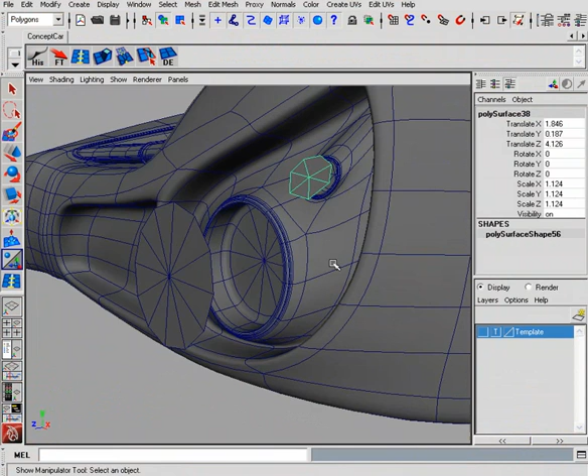In this lesson, we'll continue to work on the headlights. We've got this geometry that we copied, or duplicated, before we finished work on this headlight area itself. So we can use this for the actual headlight and also for the headlight cover.

For the headlight, let's go ahead and extrude that back, give it a little bit of thickness. Okay, it doesn't have to be too thick. And we'll go ahead and reverse those normals.

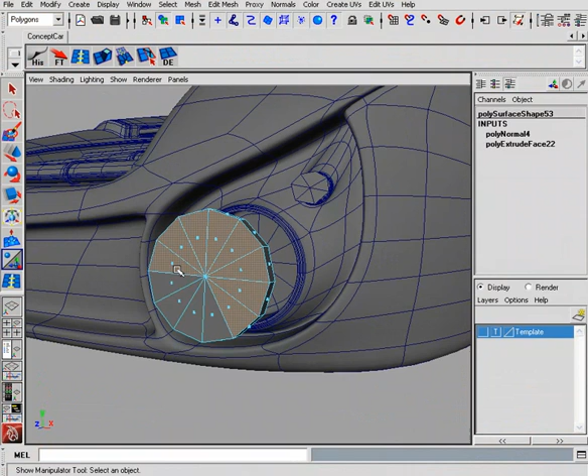Alright, let's go ahead and pick the front of the headlight. Let's give it a little bit of an interesting shape here. So let's go ahead and extrude that, scale that in.

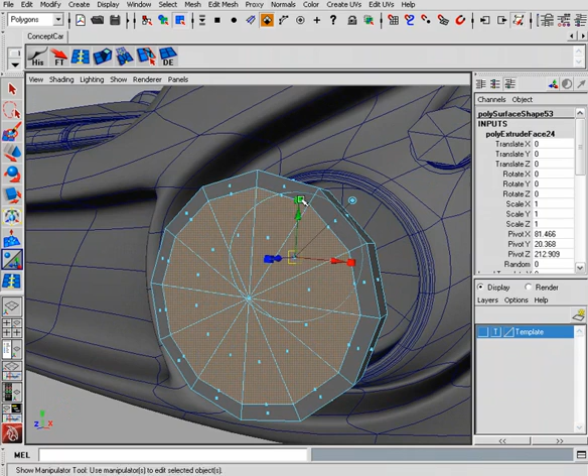Okay, and let's say that this area out here we're going to use as sort of a ring of LEDs. So we'll keep that. I'll go ahead and extrude that again, extrude it down into here.

And let's scale it up a bit. But let's pull it out just slightly. And then extrude that in.

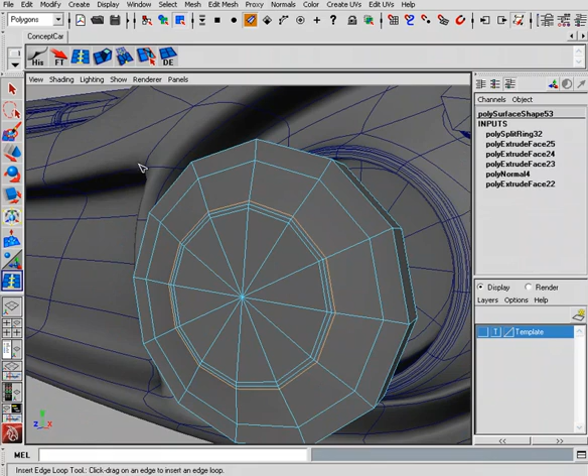Right in there. Okay, and then we'll add another edge loop right out here so that we get kind of a nice faceted look there. If we turn off our... something kind of like that. And then we can come in and insert an edge loop in here.

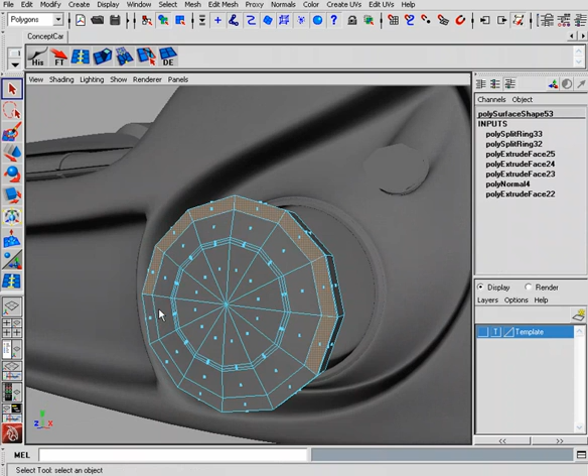Alright, let's go ahead and copy these faces for our little ring of LEDs. Go ahead and take all of those faces and just duplicate those out. Duplicate face. Go ahead and pull those off of there.

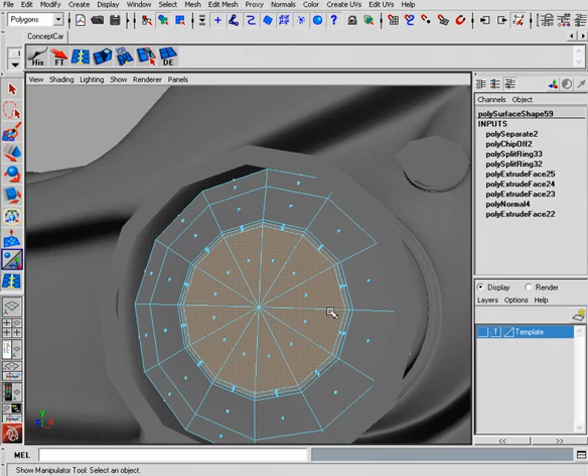Alright, and let's also choose the entire front. So we'll go ahead and select the interior here. Let's go ahead and hit Shift, period, until we get all the way just to the front there. And let's also duplicate that. Okay, and we'll pull that off as well for our cover.

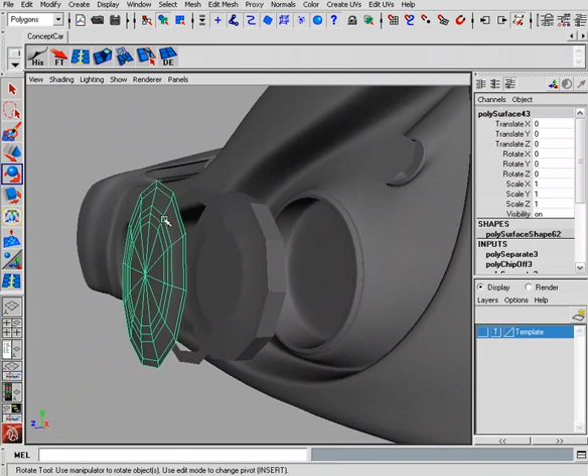Alright. Let's go ahead and grab this and let's shape it a little bit. Let's actually just scale it. And see if we scale it, that it's not going to be quite right, so we'll need to pull that off.

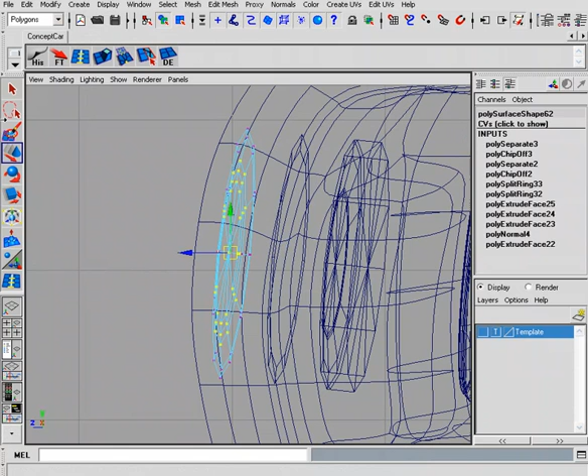Actually, so go ahead and select those, basically that whole interior section. Okay. And you can check the different axes, see what they'll get you. I'm going to go ahead and pull this off. I've got some points that I don't quite maybe have selected. There we go.

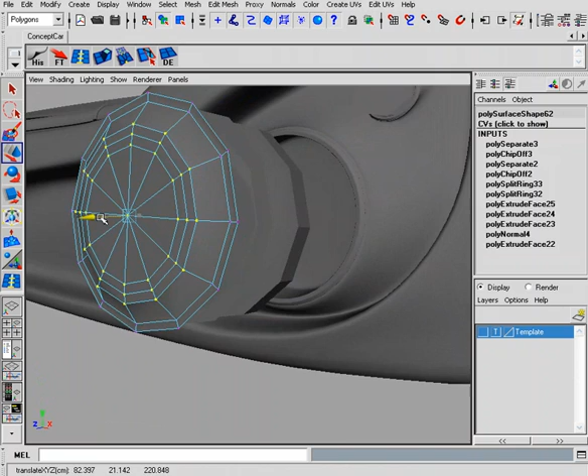And just something so that we can get the cover for our headlight. And I'll select this bridge all the way around here as well. All the way around. Okay, and that can be our headlight cover.

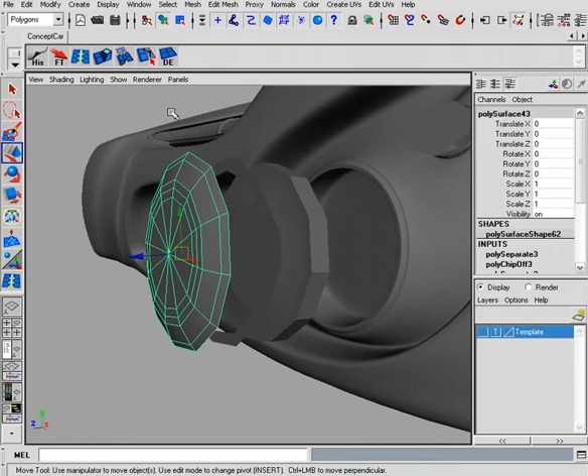Looks like we missed a point there. We're pulling that out. There we go. Pull that entire thing out, and also this.

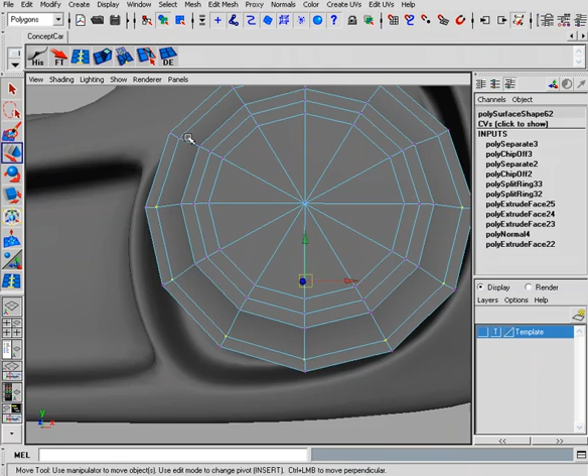And then we'll turn that ring into kind of a ring of LEDs. And select all of those points and pull them out. Just kind of like that.

Go ahead and extrude, or delete the history rather. Alright, I'm going to just pull this out a little bit more so that we can see what we're doing here. Go ahead and center that pivot.

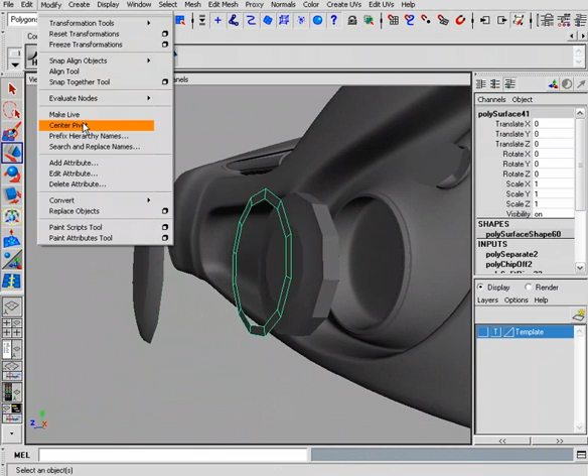Let's go ahead and smooth this. So I'm going to go ahead and do a smooth, and let's go ahead and take off preserve geometry borders, and we'll just do a smooth. And let's change our divisions to 2.

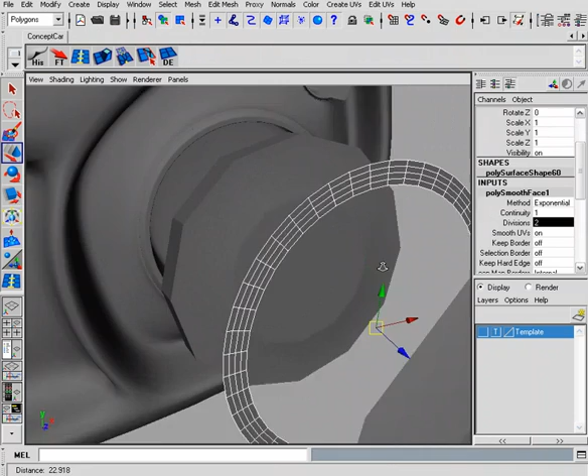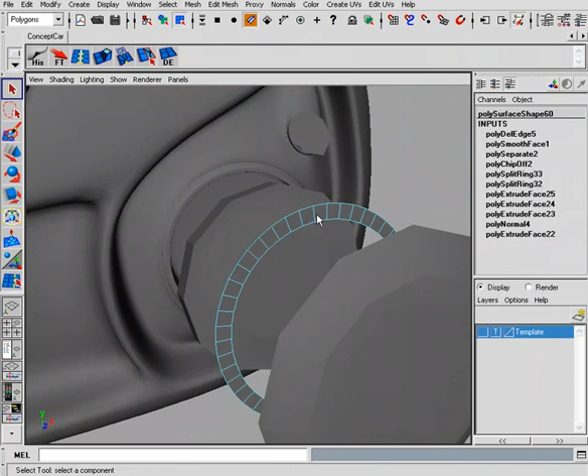Alright, okay, so what I'm going to do now is select some of these faces to be our little LEDs. Okay, I'm going to go ahead and select all of these loops and just delete those. Okay, I'll select all these faces.

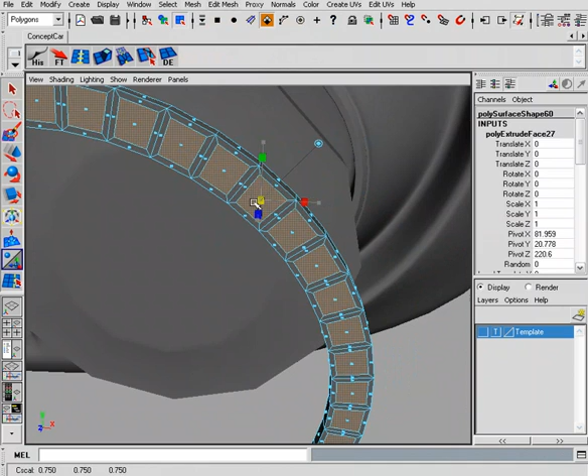And pull those back, give it some thickness. Then I'll turn off keep faces together. I'll do another extrude, and this time I'll scale that in. Okay, and we'll do another scale, and another one, and this one I'll pull straight out, and then again.

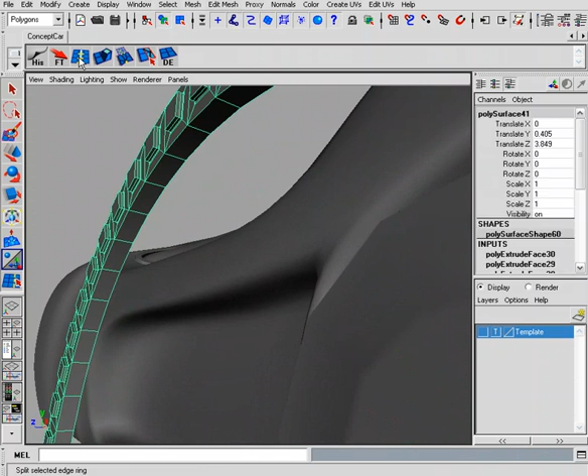So now I get something with these little lights on it, and I can add some resolution in here to hold that edge, and I can also delete the back edge if I want to. Alright, something kind of like that.

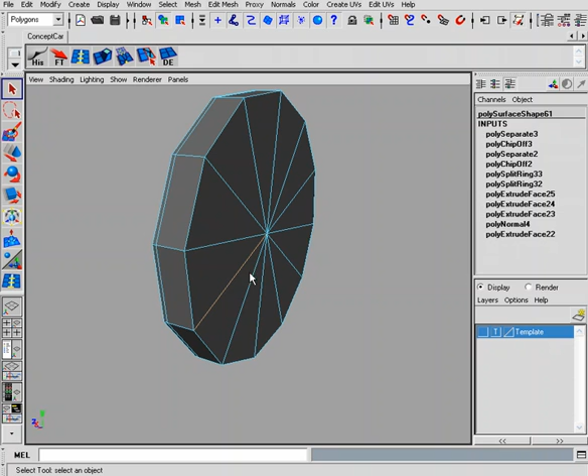Now this guy, let's say that we want to create a sort of a section and cut this apart. So let's go ahead and just select this. Let's say we want to cut a section out maybe right down here. So I'm going to go ahead and delete basically those edges. I'm going to also delete the back here, just selecting all of these faces.

Alright, so now let's decide basically where we want to cut this. We'll say that we want to kind of cut that across right there. So let's go to the front view.

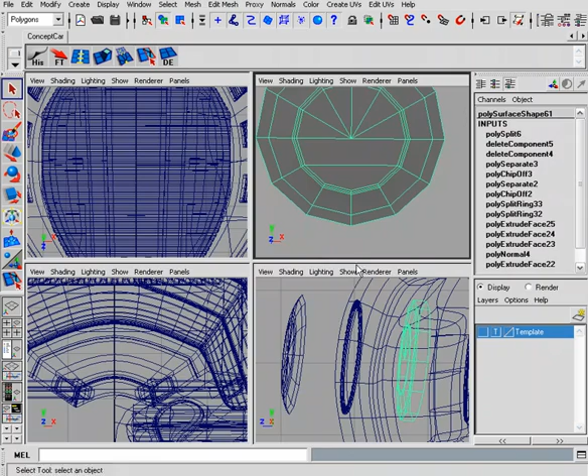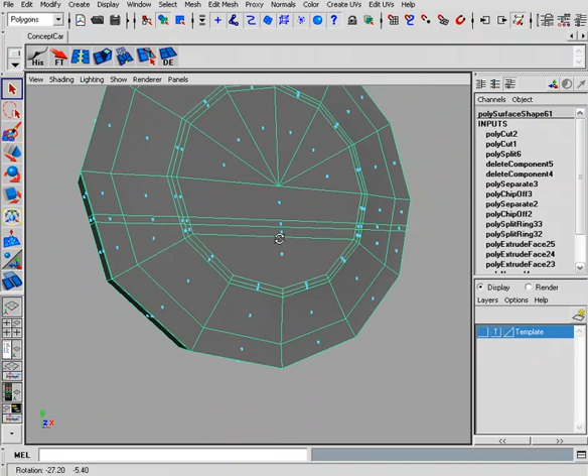And let's do a cut faces right across here, and then right across there. That'll give us a little bit of geometry to be able to cut out. Let's go ahead and select that and delete it, and delete that as well. Same sort of thing there.

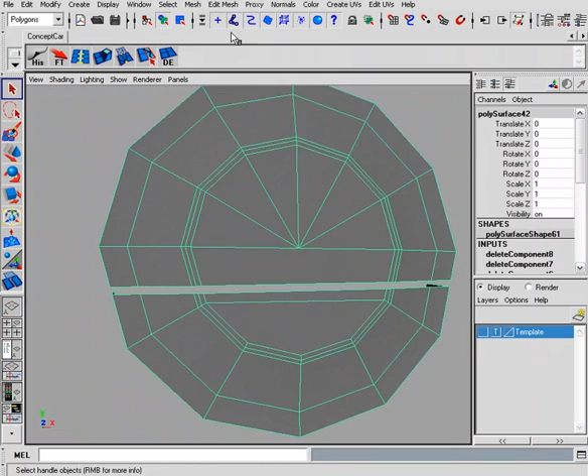Alright, now we just need to close this sort of area off. If you want to work with these separately, you can go up to mesh and separate them. That might be a little bit easier.

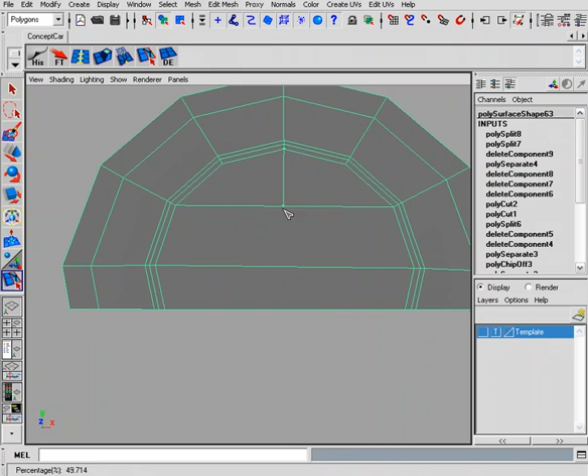Okay, and I'll just show you this piece here. We can modify our topology here. Maybe bring this straight across, bring this straight across, and just kind of avoid the poles that we had going on there. Bring that straight down. Gives us a little bit cleaner geometry right there.

Alright, then we can go ahead and take this edge, just that edge, and this edge, and go ahead and do a bridge. Then we can start to add resolution in here where we need it.

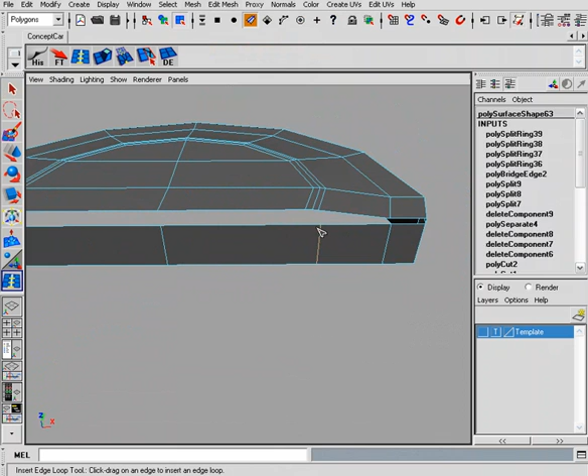So we just want to kind of flatten this off. There's 3 right in there, and 3 right in there. Go ahead and select a border edge, and we'll do a fill, and now just connect those up.

And you should have the right number to just kind of come right across and connect those up with your split polygon tool. Hit enter.

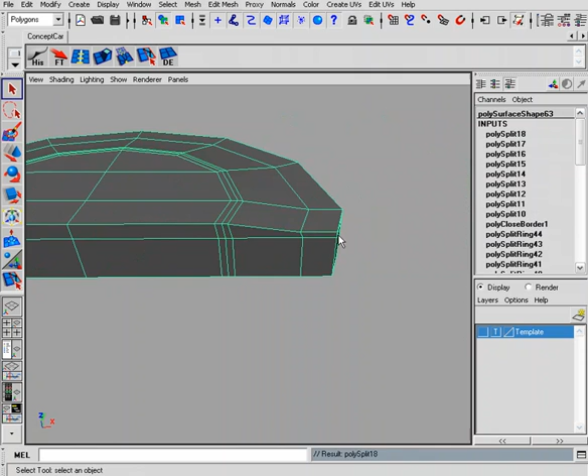Okay, and then you can come in here and add another edge loop right in here and kind of create that tightness right in there. So if we look at our other piece, we just want to do the same thing there.

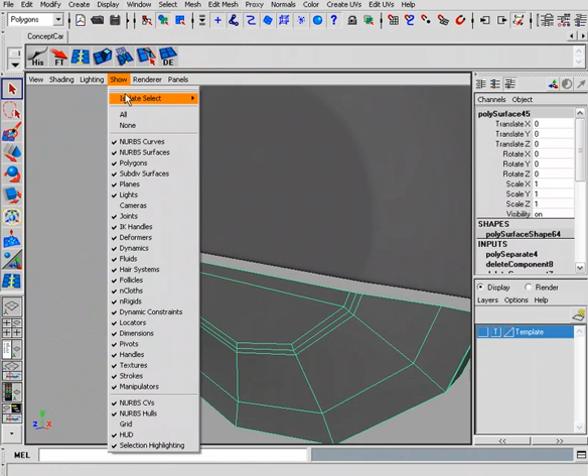Alright, and then once we have all these, we can just move them straight back into our headlight area. And you can layer that over the top. You can scale it down if you need to, and then put this over the top. And then you can just do the same thing, the exact same process we did down here with this guy.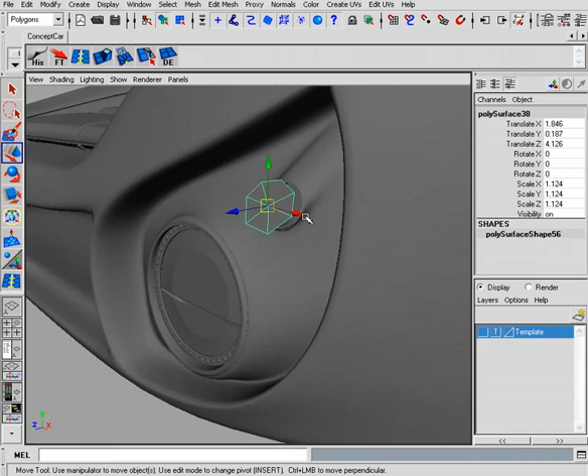I wouldn't necessarily make the LEDs. I would just make maybe just the headlight, and you don't even have to cut it apart. Just make a shape that can go in there. So I'd use it for the headlight and also for the headlight cover. So if you want to have a little cover across there, you could do the same thing as well.

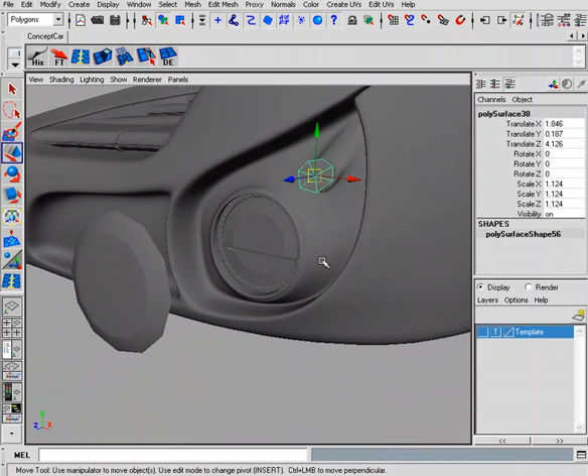Alright, so I'm going to go ahead and just put those into place, and then we're going to create some shapes that can go inside here, and also the main headlight cover itself to go on the outside of this entire headlight. So I'm going to finish that up, and then we'll come in the next lesson and continue to work on this headlight area.